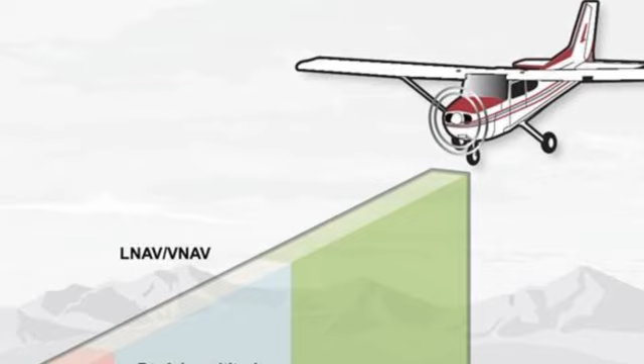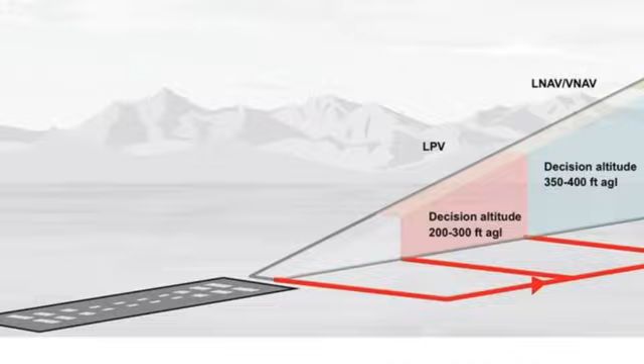Out of the 61 total occupants on board, there were 6 crew members. In the investigation, it was found that during the time of landing, the airport was visible from only 500 to 600 feet due to overcast conditions, and with the plane at a higher altitude, the pilot had to approach in a specific manner to maximize the potential to land safely without jeopardizing the passengers' safety and lives, including their own. In this scenario, the pilot was advised to follow a non-precision approach. In aviation, there are different procedures to follow based on different scenarios and conditions in order to guide the pilot when landing and having to make critical decisions.

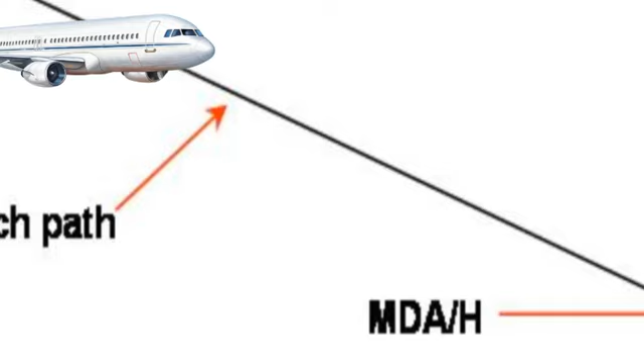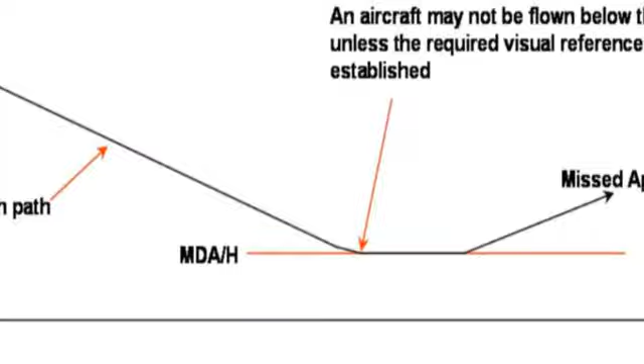With a non-precision approach, the plane must be kept at or slightly above, but not too high over, the MDA, which stands for minimum descent altitude, the lowest point a plane can reach above sea level until a visible runway can be seen. For Flight 553, it was not to fall below 1,500 feet until it reached the safe checkpoint to do so.

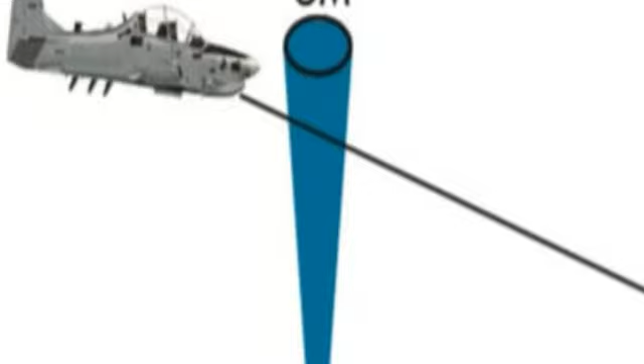This checkpoint was assigned by the flight system to an OMB, or outer marker beacon, where once passed, the pilot could then descend another 460 feet, which would be 1,040 feet above sea level, or 429 feet above ground level, the AGL.

When the plane finally reached the OMB, expected to be at around 1,040 feet, the problem quickly grew apparent, as the plane was still 2,200 feet above the minimum altitude, where the final decision to land has to be made.

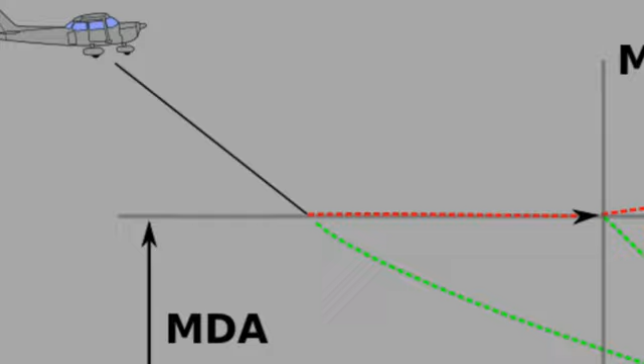When Captain Wendell realized the plane was way too high, he quickly hit the spoiler speed brakes, rapidly descending the aircraft at a rate of 1,550 feet per minute. Just for context, a usual descent rate is typically 600 to 700 feet per minute. After reaching the minimum descent altitude, he attempted to level off the plane, but failing to fully engage the throttle, the plane struck into some trees before belly sliding over roofs and finally stopping after crashing into a home.

The crash was ruled out of any foul play and was deemed to be caused by pilot error. Interesting enough, though, one of the passengers who passed away was a woman, Dorothy Hunt. She was married to a man by the name of Everett Howard Hunt Jr., a former CIA officer who was behind something known as the Watergate scandal.

On June 17, 1972, there was a break-in at the Democratic National Committee headquarters in the Washington, D.C. Watergate office building. Everett was arrested with 4 others responsible, but the scandal part came into play when word on the streets was that President Nixon at the time was in on the break-in and was the shot caller for allowing his administration to commit the burglary, and even went as far as having a voice-activated recording system in the Oval Office. Claims against Nixon left a bad stain on his reputation and ultimately pushed him to resignation.

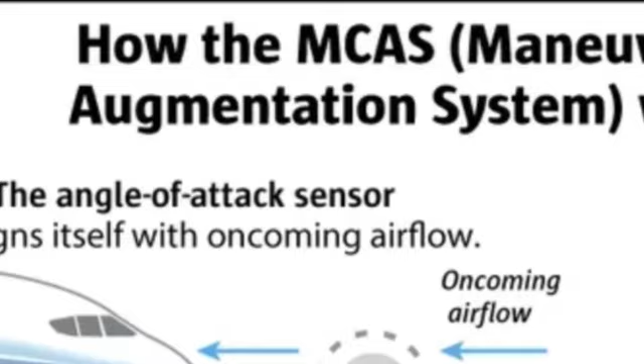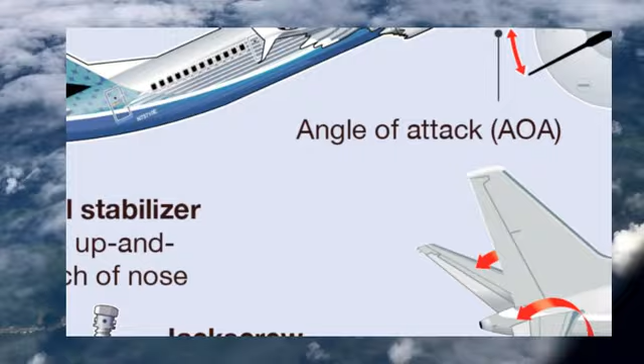It was also found that the Boeing MCAS, or Maneuvering Characteristics Augmentation System, was purposely kept secret from air crews, leaving them clueless when faced with the fatal situation. The conclusion of the investigation was a software error that caused the AOA sensor, also known as the angle of attack, to become miscalibrated, which tricked the MCAS into thinking the plane was at too steep of an angle, which is why the plane went down on its own. The pilots were partially blamed for not following the checklist protocol that could have prevented or corrected the error, but it was too late, and 189 people lost their lives.

Following the crash, the U.S. Federal Aviation Administration stepped in, including Boeing themselves, citing a warning to operators and pilots of the MAX series that they must take safety measures more seriously in order to lessen the likelihood another similar case would occur in the future. But as you're about to find out, this wouldn't be the last time.

With the devastating 2018 tragedy lingering behind Boeing, less than a year later, misfortune would come back around for seconds. This time, on March 10, 2019, Ethiopian Airlines Flight 302, another Boeing aircraft, was leaving Addis Ababa Bole International Airport, with plans to arrive at the international airport in Kenya, but again didn't make it, when this time it crashed only 6 minutes after departure. All 149 passengers, along with 8 crew members, were killed when the plane crashed in the Tulu Fara village nearby. This was notably the deadliest Ethiopian Airlines accident to date.

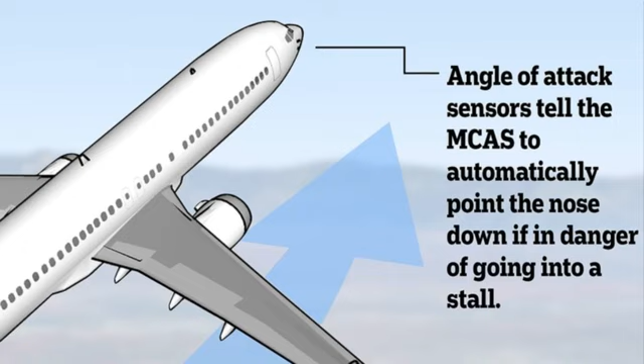The FAA once again opened an investigation while prohibiting the use of Boeing MAX, while they looked deeper into the reoccurring crashes that took place just 5 months apart from each other. In this investigation, they found there was a similarity between both crashes, and they had something in common: an error with the MCAS and AOA sensor, almost copycats of each other, putting a spotlight on the clear technical deficiencies and neglect to safely follow flight protocol.

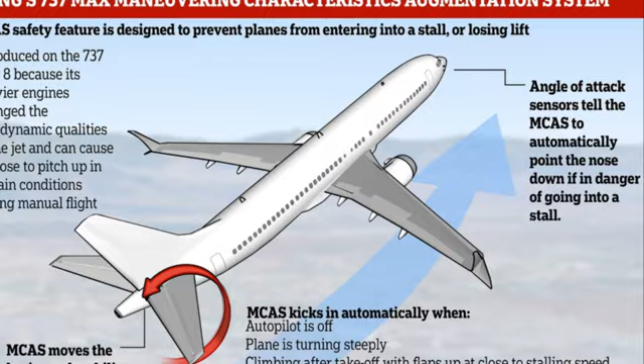Someone was in deep trouble. Years following the 2 highly preventable disasters, Boeing was punished with a lawsuit totaling $2.5 billion in order to avoid criminal prosecution, but isn't innocent of fraudulent activity in order to bypass FAA regulations, endangering and costing the lives of far too many. All of the negativity surrounding Boeing raised concerns for the safety crisis, slowly tarnishing the reputation and public image of the airline company.

Boeing is an aerospace company supergiant. From commercial airplanes to space systems, they're responsible for a large number of manufacturing for various industries. With a long track record and history backing the heavy weight behind their name being one of the top aerospace companies, there's just one problem, or a couple, they just couldn't seem to get a hold of, and that's safety.

As of 2024, there have been a total of 529 aviation accidents or incidents totaling 5,779 fatalities and 234 hull losses, all involving a 737 aircraft of some sort, each manufactured by Boeing.

As if the previous years of controversy wasn't enough, on January 5th, just earlier this year, Alaska Airlines Flight 1282 was headed to Ontario, California from Portland, Oregon, when an emergency exit door was blown open due to 4 missing screws meant to secure the door plug. Luckily, only minor injuries occurred, but overall, nobody was seriously injured out of the 177 total occupants.